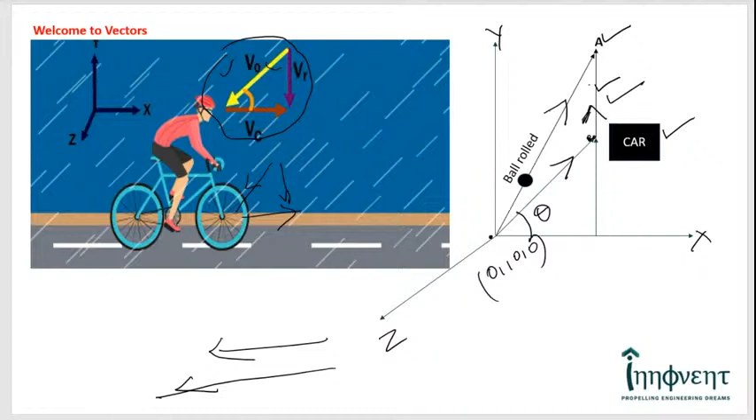When it comes to rolling, again, we use vectors, and by using vectors, you would have proved in your +1, +2 that this point O is the instantaneous center of rotation. When I say instantaneous center of rotation, that point is characterized by zero velocity. Why is so? Because there is no relative motion between this roller and the ground.

And as a consequence, you would see that V is equal to omega r, where V is the velocity of center of mass, and omega r is the velocity due to the rotation. So it's a 2-degree freedom system. Let's apply this particular concept to a GATE question.

Now you see here that since this is the instantaneous center of rotation, this is a fixed point, and if you seek velocity at any point on the roller, it is quite simple. It is omega cross the position vector, right? Omega cross the position vector.

So the highest point and the lowest point would obviously have a velocity difference of 2 omega r, because if you go by this, the topmost point, the magnitude of the position vector is 2r, and since omega is constant and they are perpendicular to each other, if you take the vector product, the topmost point is characterized by 2 omega r and the bottommost point is characterized by zero velocity.

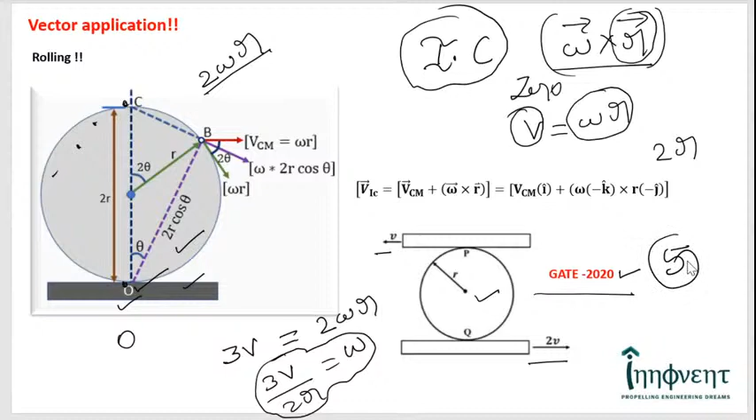Of course, it's an elementary concept, and if you look at the typical question of GATE, you can clearly see that the bottommost and the topmost point have got a velocity difference of, this is in positive x-axis, this is along negative x-axis, so the difference in velocity is 3v, and that is equated to 2 omega r, because this is perfectly rolling, GATE 2020 question, and therefore 3v by 2r is the value of omega. If you understand this simple concept, the time that you take to answer this question is approximately 5 seconds. All right.

Now let's mature the discussion slightly and look at this particular example. You see here, I want to calculate the angular velocity of this particular link, and I'm not going to apply anything new. The velocity difference between this point and this point, that is the relative velocity, is nothing but omega into the position vector, what I discussed in the last slide. See, it is applied here.

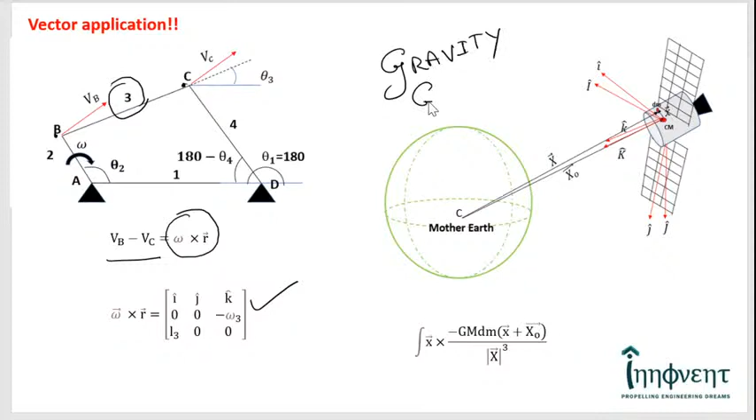Further, we can use vectors in a number of areas. I'm going to walk through before I get into a detailed devoted discussion for vectors. You might have heard in the satellite industry that especially for low Earth orbits, satellite stabilization is done via gravity gradient torque. Okay, gravity gradient torque. Most of you would have heard this.

That is, any body which is asymmetric would experience, for example, if I take this point and if I take this point, let's call it A and B. If this experiences a certain gravitational pull and this experiences certain other gravitational pull which is magnitudinally lesser or greater, then this entire satellite is subjected to a torque, and that torque is called gravity gradient torque.

You can see here, though this requires further simplification, I have chosen a mass element here. Hope you are able to see that. And I have written an expression for gravitational torque, because the resultant vector of the distance from the center of the Earth to the center of mass and the distance of the elemental mass, that is, this is the vector from the center of mass of the Earth, and this is the vector of that elemental mass from the center of mass of the satellite, and this is nothing but the gravitational force.

You might have seen this expression r square. You see here r cube, because I have expressed this in terms of vectors, and since it has to be only the direction, I again divide by the magnitude of the vector, so that is where I get this particular vector, and that cross product with the position vector x, I in fact end up getting the gravity gradient torque.

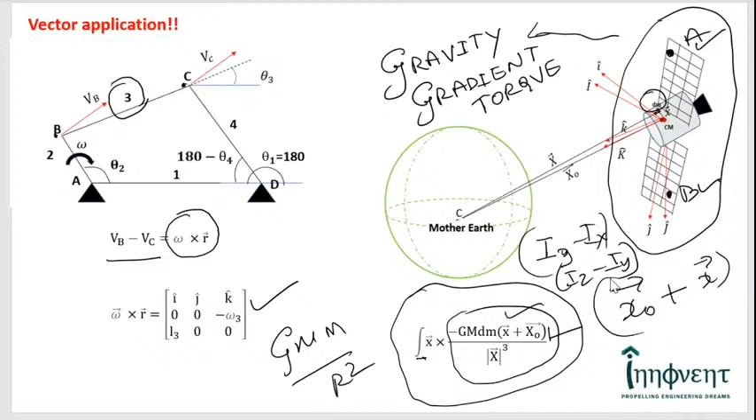In fact, if you simplify, you will get a very, very neat expression, and we would make use of the fact that gravity gradient torque is proportional to the principal inertia differences about any two axes. For example, it could be proportional to Iy minus Ix, or it can be proportional to Iz minus Iy, and of course in one of the directions, your inclination does not influence this. We'll get into that discussion in some other webinar when it comes to dynamics, but we are talking about vectors.

And similarly, if you look at the Coriolis effect on a missile, if you launch a missile, it misses the target by certain value, and that is because of the Coriolis effect. The method that we have given here to assess the deviation is a simplified one. What we say is, per se, the velocity or the displacement of the projectile is not affected by Coriolis force. Rather, the Coriolis force provides an additional displacement because there is angular velocity of rotation of the Earth, and there is velocity vector of the projectile at every point.

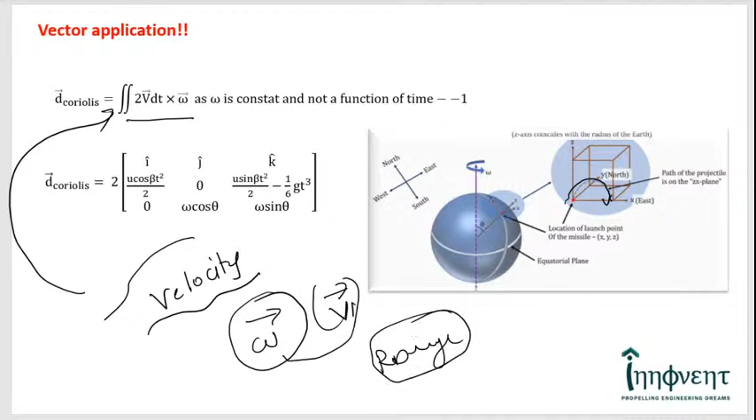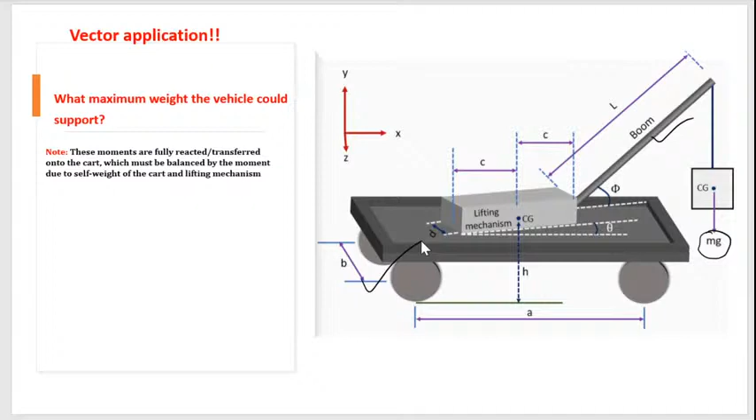And if we account for these two, the Coriolis effect provides an additional displacement, and that is where it would help the missile miss the target, and that has to be accounted for if the range is significantly large. Otherwise, the contribution by the Coriolis effect is not that great. In another example, you can see that a large weight is hung from the boom, and you can in fact calculate the moment contributed by this so as to assess the stability of this particular vehicle. Again, the use of vector product.

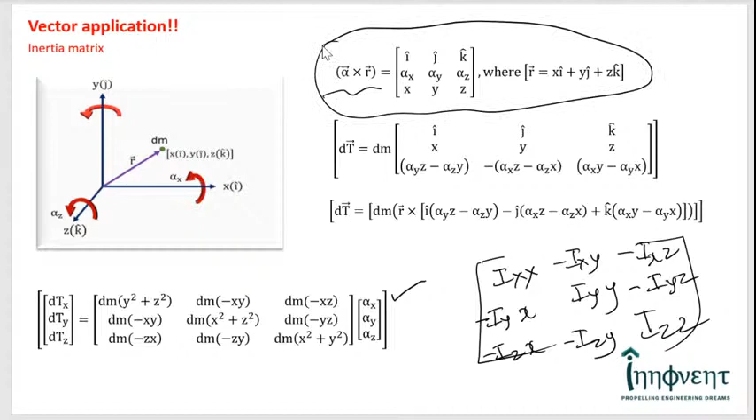Again, to derive the general mass moment of inertia tensor, what we call IXX, IYY, and IZZ. If the body is not symmetric, you would also get the cross inertia products also. We'll discuss this in detail when it comes to dynamics. I'm just telling you that using basic vector product, you are actually deriving this particular matrix also. So this matrix can be derived using basic vector product. That's what I'm trying to impress upon. I'm just going through various applications.

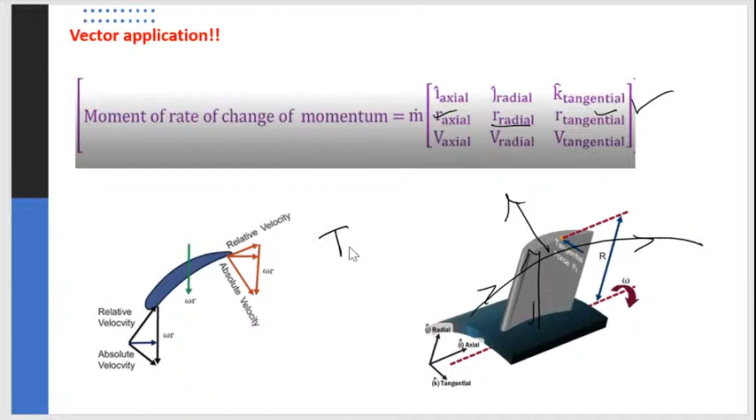Now, if you look at this particular slide, again, the vector product is used to compute the torque contributed by moment of momentum. That is, as the gas or fluid flows across the blade, there is a momentum change, and that momentum change would bring about a torque at the bottom. And you can see that for a blade, only the radial component exists, that is moment arm, and these two don't. And as a consequence, you would get two torques. One is the tangential torque, which has to be absorbed, and of course the axial torque, which is the useful torque in driving the turbine. So again, here moment of momentum of the fluid is computed using vectors.

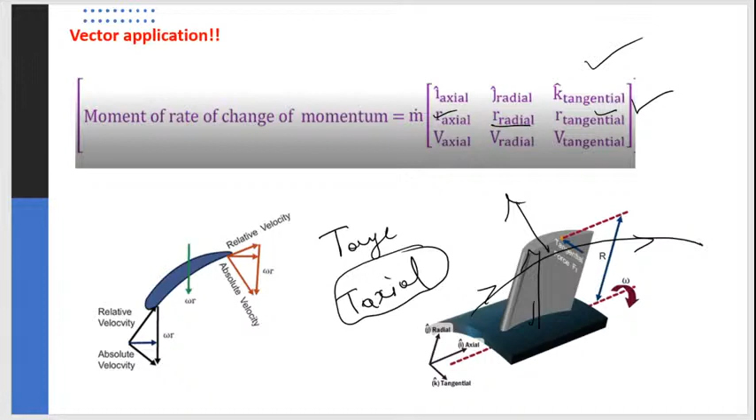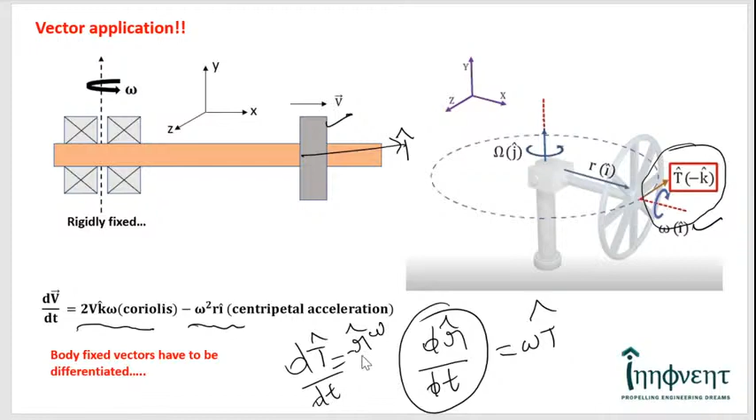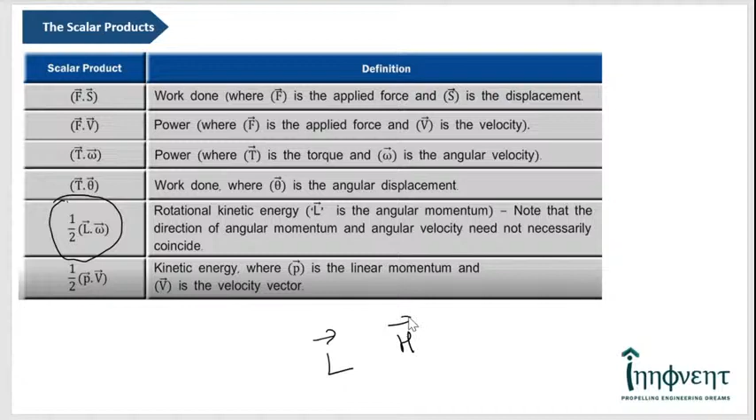Okay, these are slightly advanced concepts which we are going to cover through the course. Now, these are some typical dot products which you have learnt in your school also. But one thing I would like to emphasize here is that this is an important one, because you can see that L here we mean to be the angular momentum. Some people represent this by H also. And what is important is that if the angular momentum direction does not coincide with the direction of spin, then that leads to an unbalanced torque.

How to go about this? We would look at it carefully, and then you also look at certain typical vector products which we saw in rolling, and then this was the moment of momentum which we looked at in a typical turbo machine situation. This is again the torque expression, and similarly, you can have Coriolis, you can also have gyroscopic couple.

And one of the advantages of especially dealing with these inertial couples, gyro, Coriolis, is you are able to get the direction of the couple and hence the reaction couple, because whenever you're dealing with gyroscopic couple, you're interested in the reaction couple because it is an inertial couple. It's a non-dissipating damping factor in vibration. Okay, that should be carefully understood. We'll discuss that. But the point I'm trying to say is, if you use this formula and then derive any inertial quantity, you can rest assured that you are getting the right direction. Okay, from an elementary problem solving perspective, I was emphasizing.

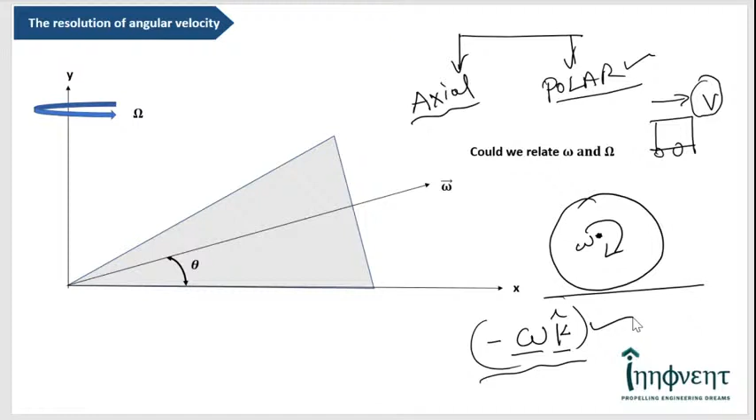Look at here. This is capital omega, that is, it is going around about the vertical axis. At the same time, it is also spinning about its own axis. And here you can in fact split omega to be omega cos theta along the x-axis, and the vertical axis component would be omega sin theta. Right? And since it is rolling perfectly, if you take the moment about this particular point of this vertical vector and equate that to 0, because the point of contact is in contact with the earth which is at rest, it has to be 0, and you would easily deduce that omega by sin theta is equal to minus omega.

And this negative sign is important. That means the sense of this omega and the sense of this omega have to be opposite to each other. Suppose this is clockwise, this has to be counterclockwise. And that is one example where we represented an axial vector. We also split and applied the axial vector at a certain point. And if you are interested in a general point, you can investigate, develop a position vector, and then differentiate once or twice depending on whether you are seeking velocity or acceleration. And again, this is a classical situation.

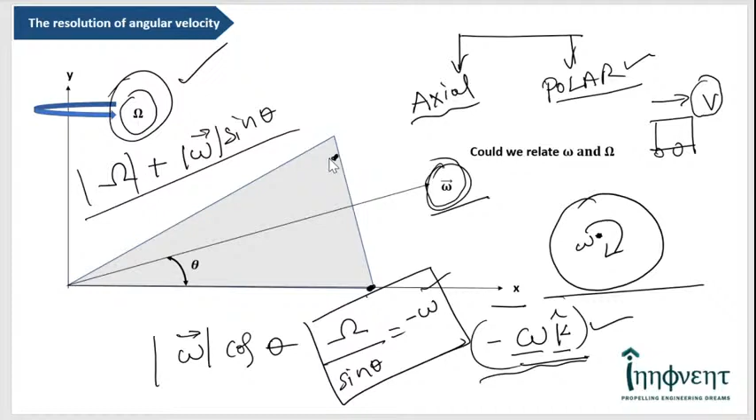Now let's move on. Let's consider one particular case which can be applied to several product lines across the industry. This is very, very important. So follow this particular derivation carefully. Though it is a very elementary discussion, it is applied in several situations. Now, as I said, let's consider a spin vector along the vertical direction. Let's also consider a general vector which makes an angle theta with respect to the spin vector.

Now, if I split this particular vector along the x-axis and also along the y-axis, that is, if I take the components, then you can see that along the x-axis, ax is the component, and along the y-axis, ay is the component.

Now let's look at differentiating this. All right. Now, I'm going to give you a very, very basic physical observation. I'm not going to be a purist here. Now here, you see, when I take the component of this particular vector on the y-axis, that vector is along the spin direction.

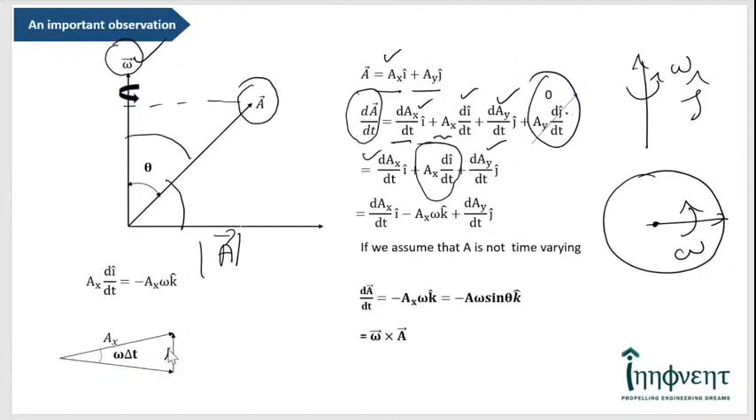And if I assume that even Ax is not changing with respect to time, and Ay is also not changing with respect to time, then I am left with only one quantity, that is Ax into di by dt. Now we can clearly see in this diagram that as A is spun, this small change is given by Ax into delta theta.

And if I take the rate of change of A vector when it is spun through a small angle delta theta, this becomes the rate of change of that particular vector. And that change, observe carefully, if you look at the top view, is happening into the plane of this particular PPT. That means it is along the negative k direction, that is negative z direction.

And this is nothing but omega. So when I compute, neglecting the magnitudinal changes, only the direction change, I get this quantity, and this can be easily converted into a vector product. And you see that the negative sign is justified because when you take the vector product omega cross A, the angle is measured from omega to A in the clockwise sense. So therefore this vector product is justified.

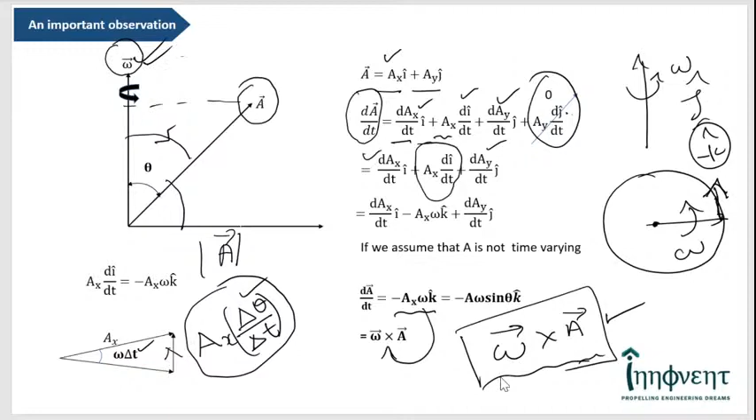So for any vector which is at an angle theta to omega, if that is spun, the rate of change is given by the vector product omega cross A. And let's apply this to angular momentum being spun by this omega, assuming omega to be constant. Let us take this to be the practical case. Of course, this diagram is drawn to give you that visualization.

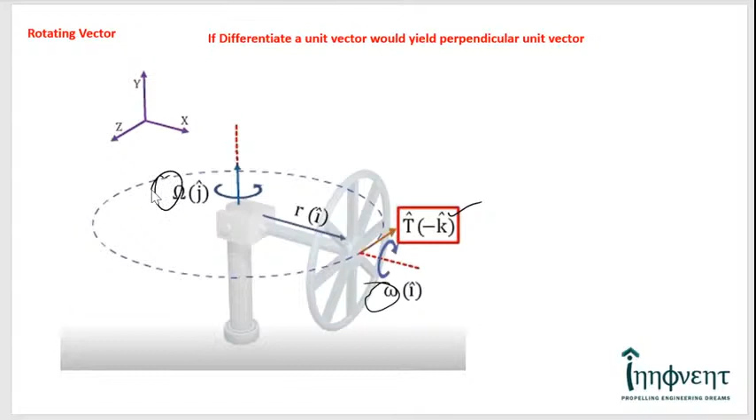When the radius vector is being spun, you can see that the change is taking place in the negative k direction. And of course, here the spin vector capital omega is kept constant. Okay. Now, where is this concept applied? This is applied to a rotor or a long compressor assembly, or it could be a disc or it could be a stick. When I say stick, it's a long, thick cylinder. When I say disc, it is a thin cylinder.

And when it is mounted at an angle theta to the direction of spin between bearings, it does experience an unbalanced couple, and that happens because the angular momentum of this rotor does not coincide with the angular velocity.

And also, look at this particular example, a heavy rotor which is hung at the end of a light cantilevered beam. Because of the self weight, this also makes an angle, and again it goes into a conical motion, and here we are talking about the gyro effect. In most of the literature, the couple experienced by the overhung rotor is called gyroscopic couple, but that may not be true; it is equivalent to an unbalanced couple. And you can also see that this unbalance is equivalent to this.

That is, the different parts of the rotor experience centrifugal forces which go to constitute the couple. In fact, from the centrifugal force moment also you can derive that particular couple. And you can see here a typical diagram where the angular velocity and the angular momentum have a different inclination, and this also leads to an angle called the nutation angle, and in most of the satellites, either active or passive nutation damping is used to control this.

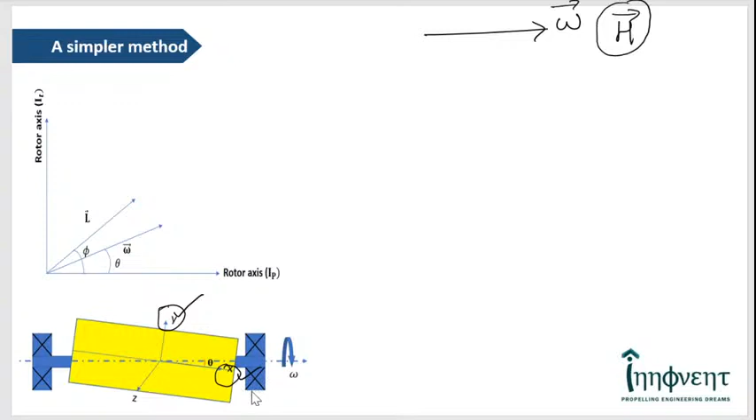The angular velocity of this rotor is along a particular axis, but you can see that the vertical as well as the horizontal principal inertial axes of the rotor are actually undergoing a conical motion. That means the angular velocity is not changing with respect to time, but angular momentum is continuously changing direction. If I call these body fixed axes, y and x, whatever momentum is associated with these axes is constantly undergoing a change in direction.

See, observe this interesting fact. Whenever I differentiate a vector, I differentiate its magnitude, let's say h, and then I also differentiate its direction. Let's say if r is the direction h is associated with, that also undergoes a change. So either the rate of change of magnitude leads to a torque, or the rate of change of direction leads to a torque. That is the beauty of the vector.

For example, if I consider a circular motion and the tangential velocity at any point, that is represented by Vt. If I get the rate of change of magnitude of the velocity, that leads to tangential acceleration. And if I differentiate the tangent vector with respect to time, that leads to what is known as centripetal acceleration, which is radially inward. That also verifies the mathematical fact that differentiating the tangent unit vector gives you the negative radius unit vector multiplied by omega.

So therefore, if you take care of the mathematics, it takes care of the physics. If you take care of the physics, the mathematics is automatically taken care of. So that's very important.

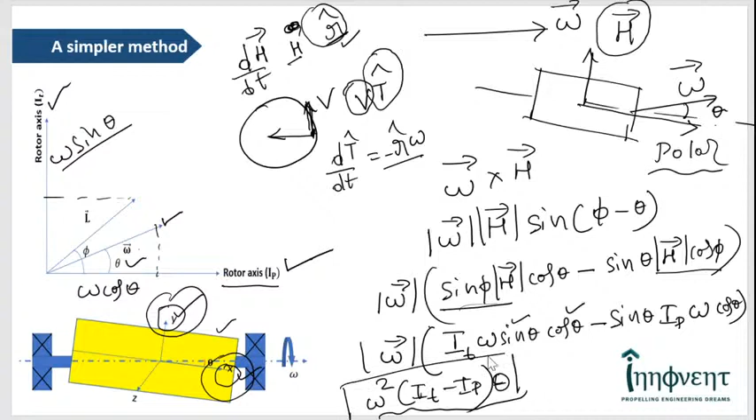As a consequence, cos theta goes to 1 and sin theta goes to theta. Hope most of the industry guys would be able to spontaneously recognize this particular term, and this is nothing but the unbalanced couple in a rotor, and it is very, very important in what direction this is, because this is determined by the nature of the rotor. If it were a disk, then it would be different.

Since in rotor dynamic language a thick long rotor is called a stick, it has this particular expression, otherwise it would have been Ip minus It, and there can be some extraordinary case where the geometry is designed such that It is approximately equal to Ip, then the couple does not exist at all. And this couple is going to be provided by the reactions on the bearings, which are the rotating reactions, because if you divide this couple by the bearing span, you would get those reactions. Obviously the reactions have to be provided by the bearings.

And one important thing, in automatic balancing machines, the rotating unbalance is in fact measured at the rotors. If the rotors are rigid, then you can use force transducers to measure, and then you can automatically correct that particular unbalance. A very, very important expression. And also in case of stick, that is a long rotor, this is pressing away from the equilibrium, that is it is tending to increase theta, and it is the other way round for disk.

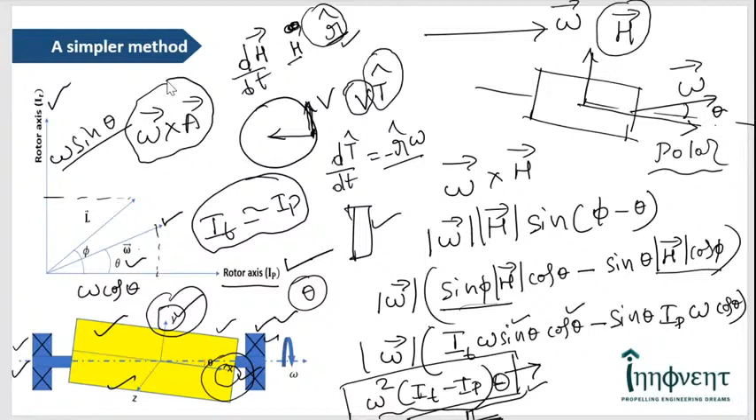And please youngsters who are watching, research why for disk balancing a vertical balancing machine would suffice, or I am talking about a self-centering effect which you can go and research. The beauty of the physics and maths is you started with a very basic vector product, and when you applied it to a practical situation, so many facts start tumbling out, and that is very important. And of course, you can also research detumbling of the satellite, which is again a very important phenomenon.

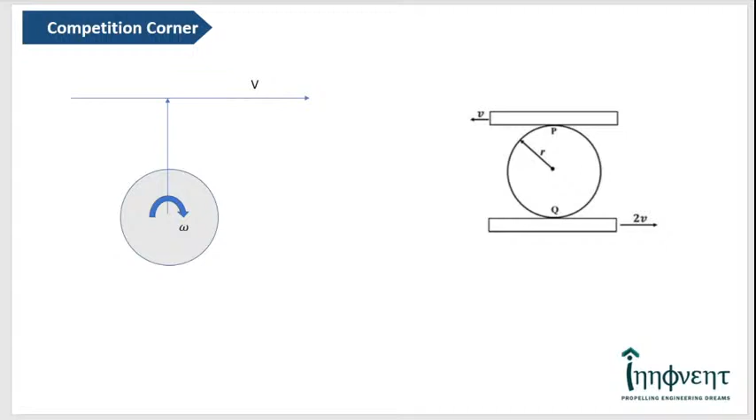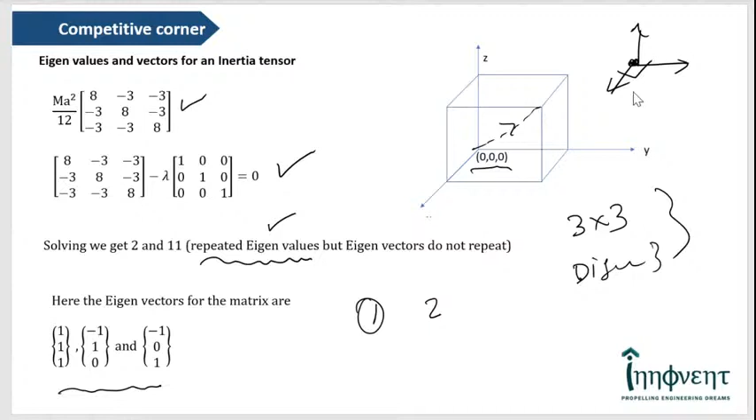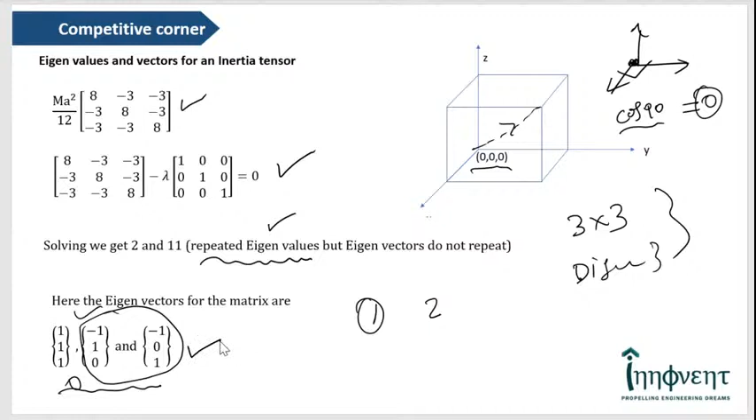And if you take the inner product of any two vectors, when I say inner product, it is the dot product. Obviously, cos 90 being the angle between them, the dot product goes to 0, right? And if you observe, that holds for only two sets of vectors. For example, if I take -1 plus 1 goes to 0 and 1 into 0, this is valid. And if I take the dot product, it is +1, 0 for these two vectors, the dot product is not 0. That means we haven't got the set of vectors which are mutually perpendicular, so they are not linearly independent.

So let's look at this particular case. How do you go about it? Now, I have got two vectors, and I would find the third vector in such a way that this vector is perpendicular to the other two vectors.

When I do some basic algebra and then arrive at this, I get this particular vector, and you would see that this is actually perpendicular to the remaining two vectors. So the requirement of orthogonality is actually satisfied, right?

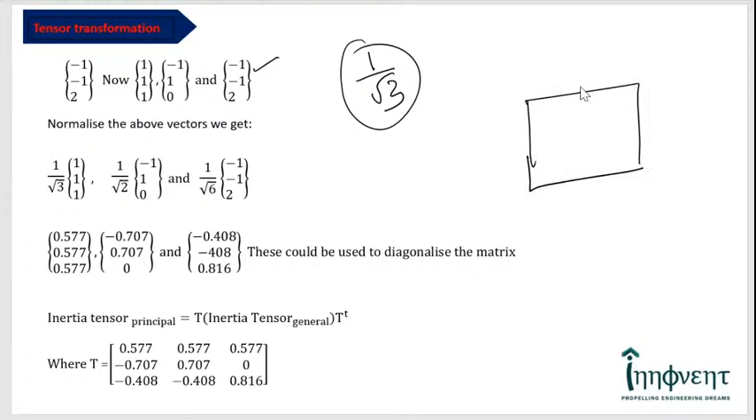Now let's come here. If I normalize these vectors, if it is 1, 1, 1, then I would divide that by √3. It is easy to explain: if you consider a cube and calculate the direction cosines of the solid diagonal, from this corner to this corner, you would see that it is inclined equally to the x, z, and y axes. As a consequence, each angle, cos phi, is 1 by √3. So when you normalize, you get 1 by √3, which is 0.577.

Similarly, you can divide this vector by √2. You get these two, and then the third vector could be divided by the root of 2 squared, which is 4, plus 1 plus 1, that is √6. When I did that, I get this vector. And look at the question.

The candidate was not only asked to find these vectors, but was also asked to construct the transformation matrix using this. Coordinate transformation is applicable to any tensor, and this is basically the nature of the equation you are seeing here: an orthogonal transformation matrix, the inertia tensor, and then the transpose of that matrix. What I am doing essentially is putting my first eigenvector in the first row, then the second eigenvector, and the third eigenvector.

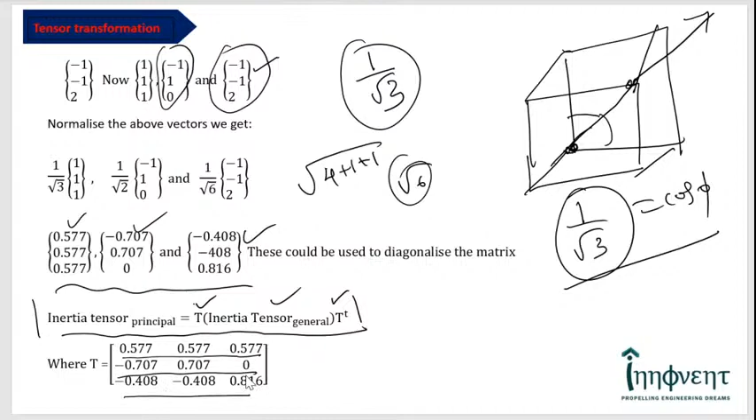When I do that, you can see that my inertia tensor is getting reduced to the principal inertia tensor, which means I am getting the 3 principal inertias: one about the solid diagonal, and the others about 2 axes which are perpendicular to the solid diagonal. It is easy to interpret.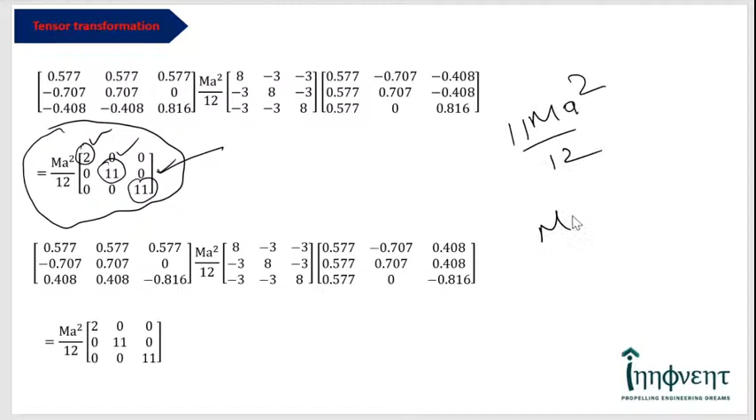Why am I getting 11 ma² by 12? Because through the solid diagonal, my inertia is ma² by 6 plus m into the square of the distance from the CG to the origin, which is √3 by 2. If you square it up and simplify, you will get 11 ma² by 12. Okay, it is easy to interpret.

And you can see that even if you were to take the reverse of the third eigenvector, that means instead of minus 1 in your algebra, if you were to calculate 1, 1, minus 2, the transformation again yields the diagonalized principal inertia tensor. Diagonalized inertia tensor, or you can simply call it the principal inertia tensor.

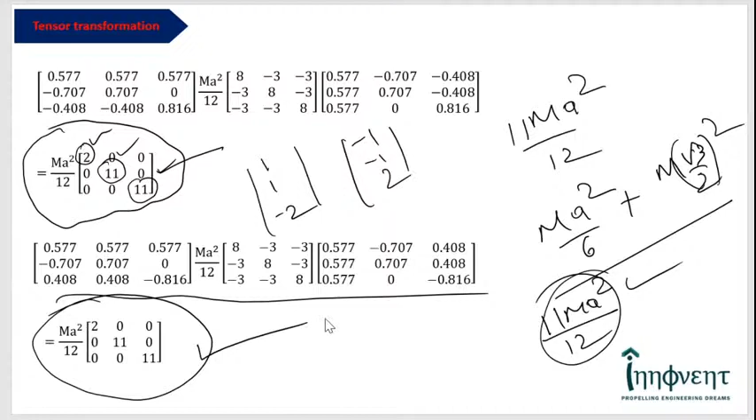Now we'll choose one more example to physically visualize this. Of course, you can use GeoGebra or MATLAB, a lot of free mathematical tools available online, and you can see whether they are orthogonal or not. And more than the mathematics, using MATLAB, Maple, GeoGebra is very important, because that builds a lot of visualization and detailed understanding. Look at this particular simple vibration example.

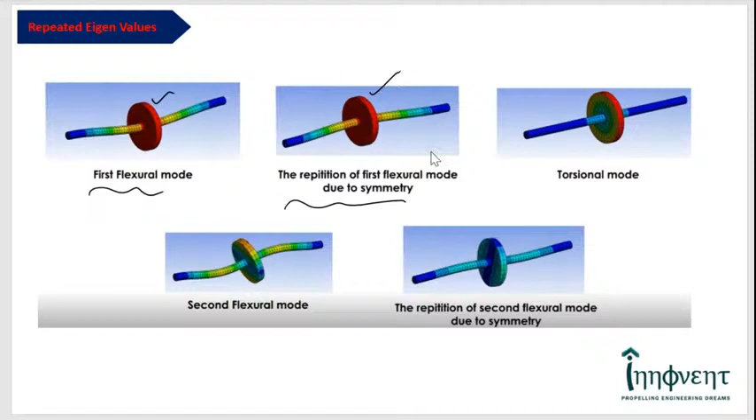If you simulate this in ANSYS, you will get repeated roots, right? That is because of the symmetry. See, this rotor is vibrating in the vertical plane, and this rotor is vibrating perpendicular to that, in the horizontal plane. The eigenvectors do not repeat. That is very important. Eigenvalues repeat, eigenvectors do not. And you can see that the second flexural mode also repeats, but again in different planes. So this is one more example. So thus, eigenvectors, you can find lots and lots of applications for mechanics.